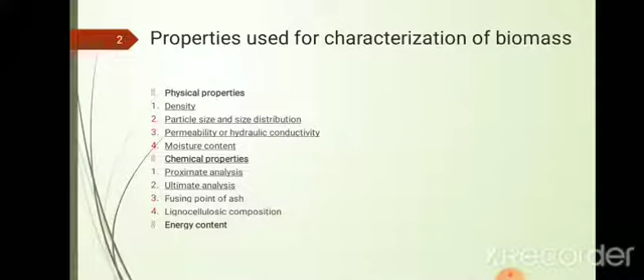Now remaining properties are, one is the fusing point of ash. Then another important characteristic is the ligno-cellulosic composition of biomass. And finally, energy content of biomass. So all these three we have to discuss in today's session. So first we will discuss the fusing point of ash. So what do you mean by fusing point of ash? As you know, the ash will be formed if you are using biomass in a gasifier, or if you are burning biomass in an incinerator or cook stove, etc. The residue formed will be ash.

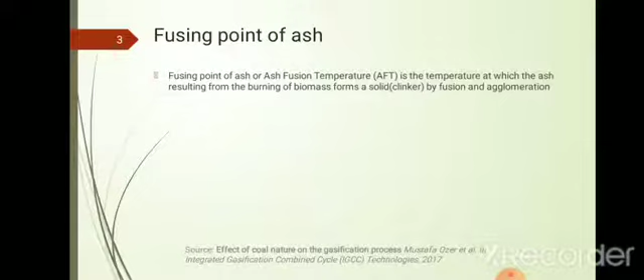So this fusing point of ash is also known as ash fusion temperature, AFT. It is the most commonly used name for this property. It is a temperature at which the ash resulting from burning the biomass forms a solid clinker by fusion and agglomeration. So it is the temperature at which this ash will start fusing, melting of ash will occur. So this will together join and will agglomerate. That is the temperature, the starting point of this agglomeration.

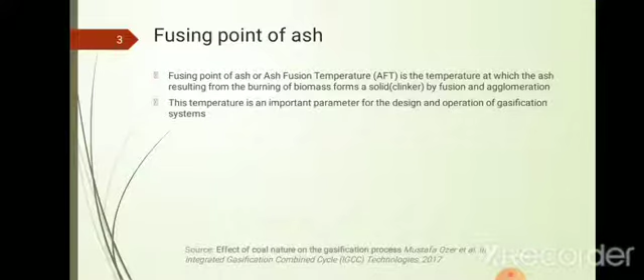And this temperature is very important in the design and operation of especially gasification systems. In fixed bed and in fluidized bed gasifiers, the operating temperature of the gasifier must be lower than this AFT. So that is the first thing we have to understand. In fixed bed gasifiers and in fluidized bed gasifiers, the operating temperature should be less than this AFT, so that this fusion will not occur.

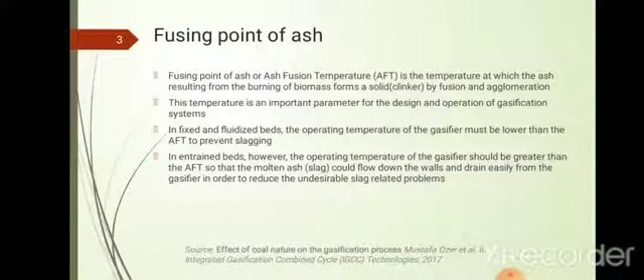But in entrained bed gasifier, that is a modern type gasifier in which high temperature is used and particle size is very less, the operating temperature should be greater than AFT. So why is it greater than AFT? So that the ash will melt and will flow down the walls of the gasifier and drain easily from the gasifier. That is for entrained flow gasifier, which will reduce the slag related problems. And typical ash fusion temperatures are around 1100 to 1200 degrees Celsius.

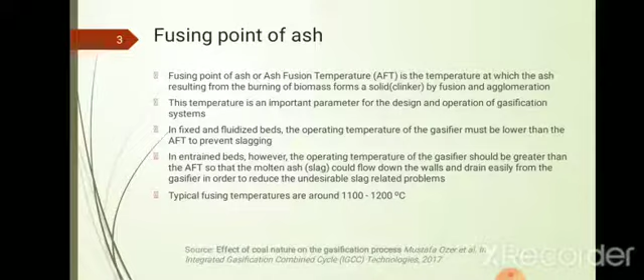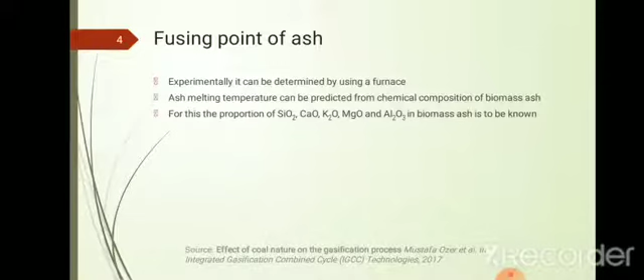And how can we determine this AFT? We have two methods. Either we can experimentally determine using a furnace by measuring temperature, etc., or we can predict the ash fusion temperature by knowing the chemical composition of this biomass ash. Different biomass ash will have different chemical composition. Mainly the ash contains silicon dioxide, calcium oxide, potassium oxide, alumina, magnesium oxide, etc. If you know the percentage of these compounds in that ash, we can predict the ash fusion temperature using empirical relations. Otherwise we can determine it experimentally, and this test is known as the AFT test.

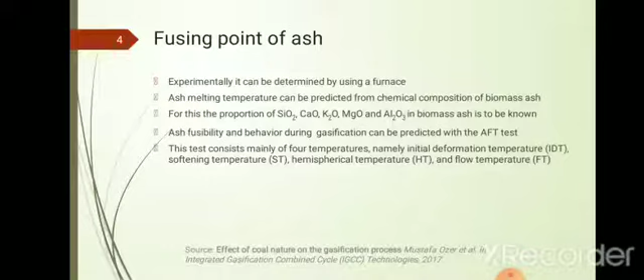And mainly in gasification, etc., if you have to study the effect of ash fusion temperature, we have to determine four temperatures, that is initial deformation temperature, softening temperature, hemispherical temperature, and flow temperature. All these are related to our ash fusion temperature. You can further refer to these with the help of journals and textbooks. So this is the importance of ash fusion temperature.

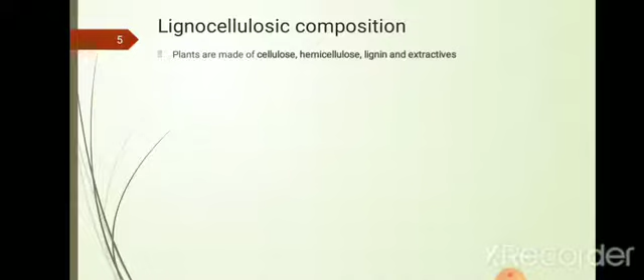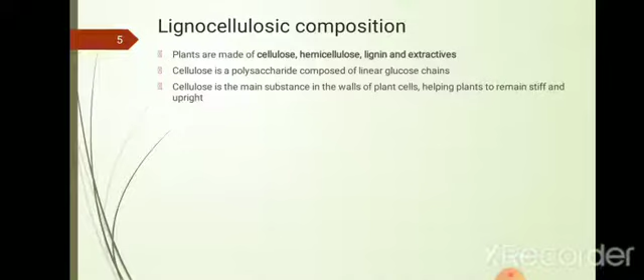Now another important property is the ligno-cellulosic composition of biomass. You may know that every plant material and parts like stem, leaf, fruit, etc. are made of these four compounds, that is cellulose, hemicellulose, lignin and extractives. Cellulose is a polysaccharide of linear glucose chains. It is a polymer of glucose, straight glucose chains, and it is a main substance in the wall of plant cells, and this cellulose helps the plant to remain stiff and upright.

While hemicellulose is different from cellulose, it consists of a short and highly branched chain of sugars. Its molecular weight can be 50 to 200 times the basic unit. So it is slightly different from cellulose. It is not a straight chain; a highly cross-linked structure is there. And it is a polymer of 5 different sugars, which are D-xylose, L-arabinose, D-galactose, D-glucose and D-mannose, and uronic acid. All these are organic compounds. So cellulose is just a polymer of glucose only, while hemicellulose consists of these 5 sugars and uronic acid.

And the branched nature of hemicellulose renders it amorphous, and it is relatively easy to hydrolyze. So if you are using fermentation for producing enzymes from biomass, or if you are using anaerobic digestion, like biogas, we will be anaerobically digesting this biomass to form methane and carbon dioxide. In that case, this hemicellulose is very easy to hydrolyze compared to cellulose and lignin.

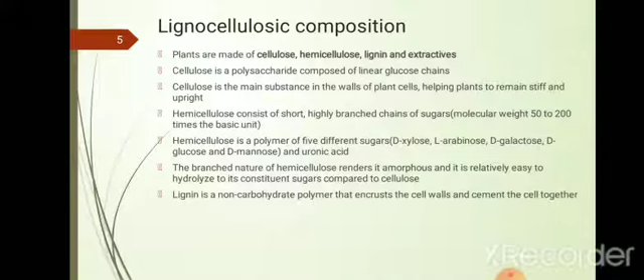And what is lignin? Lignin is a non-carbohydrate polymer that encrusts the cell wall and cements the cells together. So lignin helps to cement the cells of the plant, and it is very highly complex in nature. And lignin is hydrophobic in nature. That means it does not conduct water. So that is why the surface of leaves etc. contains lignin.

And the most important thing in our perspective is that lignin is the most slowly decomposing component of dead vegetation. So if you are using biomass for anaerobic digestion, that is for biogas production, this has to be considered. If our plant material is made mostly of lignin, it is not suitable for energy production through anaerobic digestion. So this is very, very important. We will discuss this in future.

Then what are extractives? Extractives are any substance that can be extracted from the plant using a solvent. They include crude protein and oils. Certain plants, seeds, etc. will contain oil, starch, sugar and other things. Anything that can be extracted using a solvent is known as extractives. So these are the 4 categories of plants based on their cell construction.

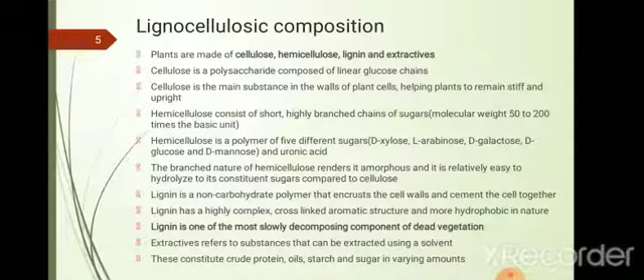Then there is a procedure for determining all these. There are chemical engineering procedures for how to determine all these four quantities. So first we have to determine the extractives. For this we take a dried sample, a known mass of biomass, say M0 gram, that is leached with a benzene and ethanol mixture in the volume ratio of 2:1 at a fixed temperature for 3 hours.

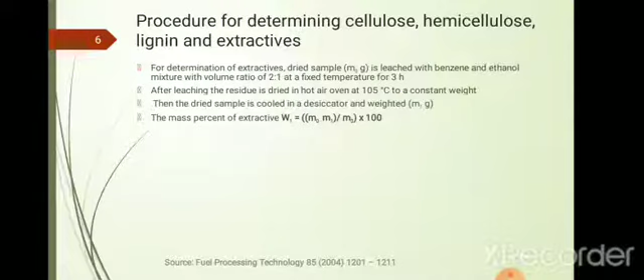And after leaching, this is again dried in a hot air oven at 105 degrees Celsius to constant weight. This will reduce the mass; the extractives will be removed and the weight will reduce. The dried sample is cooled in a desiccator and weighed, giving M1 gram. Initially it was M0 gram, and after this procedure it is reduced to M1 gram. So the percentage of extractives, W1, will be M0 minus M1 divided by M0 into 100%.

Then after that we will determine hemicellulose for the same sample, this M1 gram. After the first procedure, the residue is put in a flask with 150 ml sodium hydroxide solution, that is 20 gram per liter of sodium hydroxide. Then it is boiled for 3.5 hours with recycled distilled water. Then the residue is washed with distilled water till no sodium ion is present in the washed liquor, and dried. Again it is cooled in a desiccator and weighed, and the weight will be reduced to M2 gram.

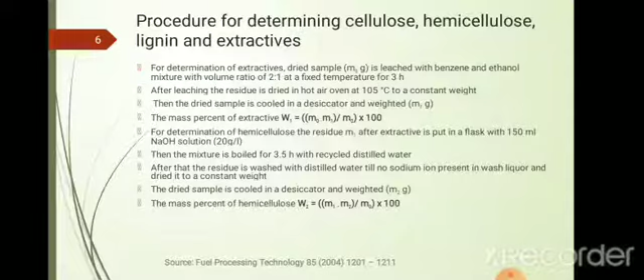So initially we have taken M0 gram. After extractive determination, it was reduced to M1 gram, so extractive is M0 minus M1 by M0. Then the M1 gram has gone through the second procedure with sodium hydroxide, and it is reduced to M2 gram after drying and cooling in the desiccator. Then hemicellulose will be W2, which is M1 minus M2 divided by M0 into 100%. Again the denominator is the initial mass M0. The hemicellulose removed is M1 minus M2, so that is our ratio of hemicellulose.

So now cellulose and lignin are remaining. Third, we have to determine lignin. For this we take about 1 gram of residue after the extractive analysis. This weight is again dried and cooled, and it will be M3 gram, and it is mixed with 30 ml of sulfuric acid. So now we are using acid for removing lignin. The sulfuric acid is 72% concentration and is kept at a temperature of 8 to 15 degrees Celsius for 24 hours.

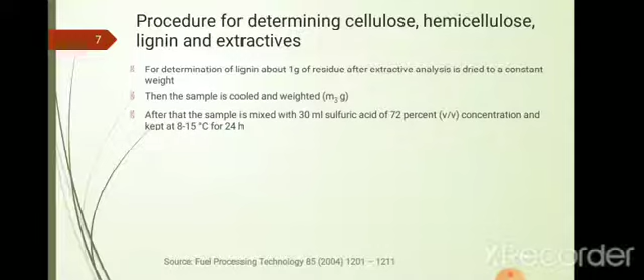This mixture is diluted with 300 ml of distilled water and again boiled for 1 hour with recycled distilled water. Again, after cooling and filtration, we have to wash it so that no sulfate ion is present. Sulfate ion can be identified using a 10% barium chloride solution. Then it is dried, and the new weight after cooling and drying in a desiccator is M4 gram.

So the mass percentage of lignin, W3, will be M4 into 1 minus W1. We have taken 1 gram of mixture initially, then minus W1. W1 is extractives; we have already removed the extractives. Extractives converted into a fraction, small w1, is capital W1 by 100. Divided by M3, because we have M3 gram after drying and cooling before this experiment. So M4 into 1 minus W1 divided by M3 into 100%. This is our lignin percentage.

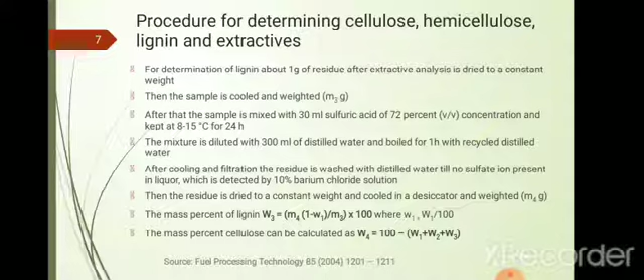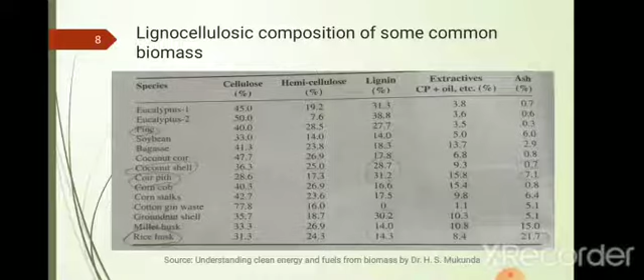And the last one is energy content. What is energy content? We are mainly looking for the calorific value or heating value of the biomass. Heating value or calorific value of a substance is the amount of heat released during combustion of a specified amount of it. Normally, for liquid and solid fuels, it will be in kilojoule per kilogram, kilojoule per mole, kilocalorie per kilogram or BTU per pound. All these units we can use for the energy content.

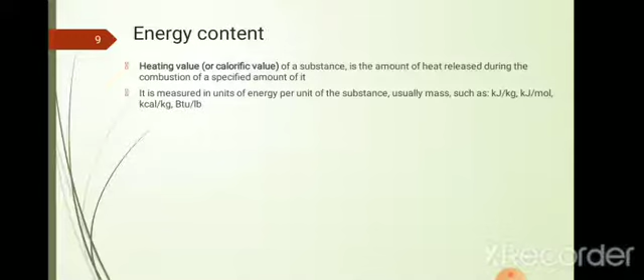But for gas, the calorific value will normally be in megajoule or kilojoule per normal meter cube. So instead of kilogram it will be mostly in meter cube, and we can convert that into kilogram using the volume flow, etc. So this is our heating value, and we have two heating values. We already know higher heating value, HHV, also known as the gross calorific value.

So what is higher heating value? If the products of combustion are brought back to the original pre-combustion temperature and all the vapors, mainly water vapor, are in condensed state, this will be the higher heating value, because the water vapor will give its latent heat of vaporization and contribute to the calorific value. Normally this temperature is standard temperature and pressure, that is 15 degrees Celsius, not room temperature, not 30 degrees. It is assumed our products are at 15 degrees.

And what is lower heating value? Lower heating value is determined by subtracting the latent heat of vaporization of water vapor from the higher heating value. So in lower heating value our products, especially water, will be completely in vapor state, not condensed state. We will determine the higher heating value experimentally, and we can calculate the lower heating value by subtracting this latent heat of water.

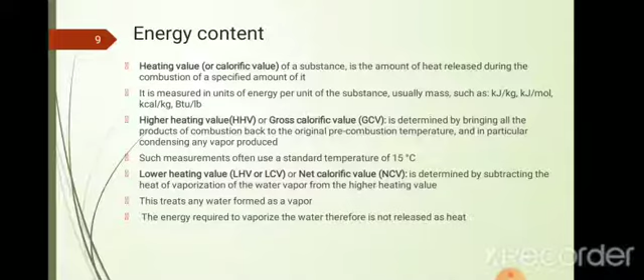So here the energy required to vaporize water is not released as heat. That is why it is less than the higher heating value. Now we have to determine this for solids, and our biomass will be mostly in solid or liquid condition. Gaseous biomass is not that present. It will be converted to gas only after gasification or some other process.

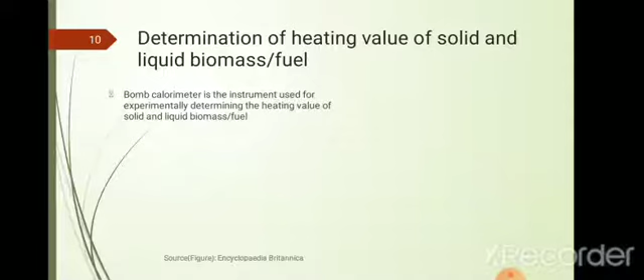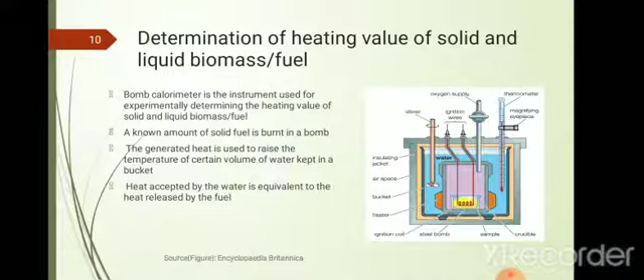The heat liberated by burning this sample is used for raising the temperature of a certain quantity of water kept in a bucket, and heat absorbed by this is equal to heat released by the fuel or biomass. So this is an actual bomb calorimeter. You can see a crucible where we place the 1 gram measured sample, and it is inserted in a bomb, and we have an oxygen supply inside that bomb. Then that is placed inside the water bucket, which is again placed in a steel container. Mostly all of the material will be stainless steel, and we have provision for measuring temperature, etc.

So what is the procedure? First, a 1 or maybe 1.5 known grams of biomass is placed in the bomb, and it is pressurized with excess pure oxygen, and it is submerged in a known volume of water, mostly 2 kilograms of water, and this water bucket is put inside a steel container, and then it is electrically ignited. It is burned, the energy is released, and it crosses the stainless steel wall.

So first it has to cross the stainless steel wall of this bomb, and it will increase the temperature of the water jacket. It will not purely increase the temperature of the water jacket; some heat is absorbed by the bomb container also. It is made of stainless steel with some heat capacity, so its temperature will also increase, and we will measure this with a thermometer, and when it reaches an equilibrium temperature we can calculate the calorific value.

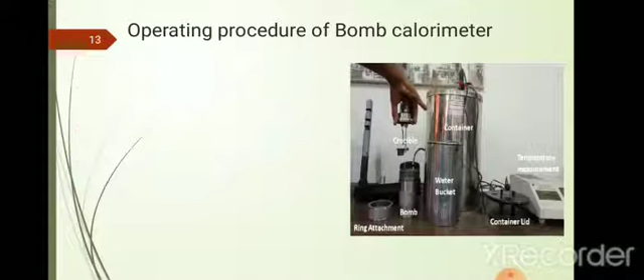And once the experiment is over, we can release the pressure by reducing the oxygen supply, and after the experiment we have to check the bomb for any soot formation. If there is some incomplete combustion, there will be some carbon soot or particles present inside the bomb. If that is the case, the test is to be repeated. So after the test we have to check the bomb for any soot formation, because it implies that there is an incomplete combustion.

And after the experiment, the interior surface of the bomb is washed with a jet of distilled water. So we will wash it with distilled water, and these washings are titrated with the standard sodium carbonate solution, using methyl orange or methyl red indicator. Normally 0.0709, so that much concentration of sodium carbonate solution is used for titration.

And another thing, we have to find out the unburned piece of fuse wire. The unburned piece of fuse wire will be there inside the bomb, and we have to straighten that, and the combined length is subtracted from the initial length. Normally 10 centimeters will be the initial length of fuse wire. This is for finding out how much energy is contributed by the fuse wire.

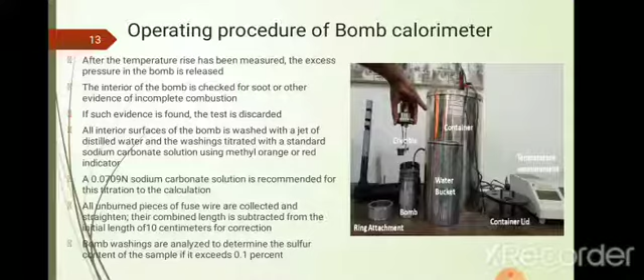Similarly, the washings have to be analyzed for any sulfur content. If the sulfur content present in these washings is more than 0.1 percent, we have to again do some error correction for that. So there are three error corrections we have to do: one is for the fuse wire contribution, another one is for the presence of sulfur, and another one is for the sodium carbonate titration. So we will see how it is calculated based on this experiment.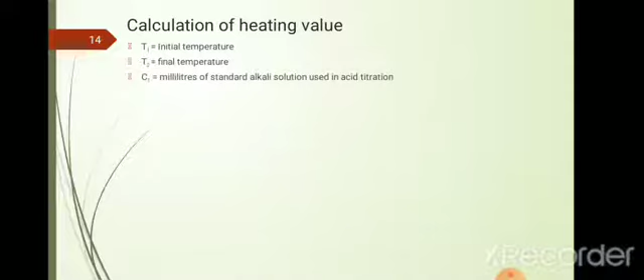Suppose T1 is our initial temperature, that is before the ignition. T2 is the final temperature, and C1 is milliliters of standard alkali solution, that is sodium carbonate solution, used for acid titration. C2 is the percentage of sulfur in the sample, and C3 is the centimeters of fuse wire consumed. M is the mass of sample, normally it will be 1 gram.

And capital W is the energy equivalent of the calorimeter in calories per degree Celsius. These are calculated in calories, and then we can convert into kilojoules or megajoules, etc. So what is this W? Actually it will be the heat capacity of water plus heat capacity of the bomb material. So it will be mass of water; suppose we have taken 2 kilograms of water, it will be 2 into specific heat of water in calories per degree Celsius,

plus mass of the bomb material into its specific heat, that is the stainless steel bomb wall material. So this is a constant for a particular bomb. If you purchase a particular bomb calorimeter, this capital W, the energy equivalent, will be given by the manufacturer or supplier. Actually this is the mass of water into specific heat of water plus mass of the bomb into specific heat of that material. So it will be supplied.

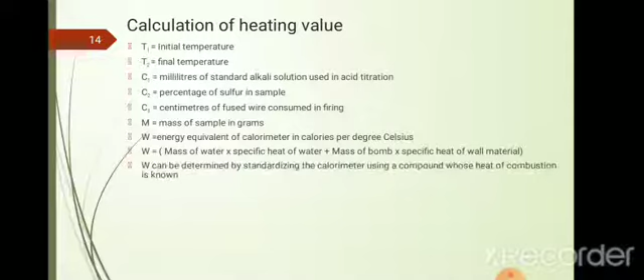Or we can calculate this by using a known material whose calorific value is known, and normally a pellet of benzoic acid, not less than 0.9 gram or more than 1.25 gram, is used. This is not required if it is supplied by the manufacturer; otherwise we have to determine this capital W. For this we use a known quantity of a particular fuel, here a pellet of benzoic acid, whose calorific value we know. Using that we carry out the test, find the temperatures, and back calculate the W value for future purposes.

And by energy balance, this is a basic equation. We know that energy given by the biomass sample is equal to the energy gained by the bomb plus water. So M into CV, capital M is the mass of sample, into calorific value will be this water energy equivalent W into temperature change, that is T2 minus T1, delta T.

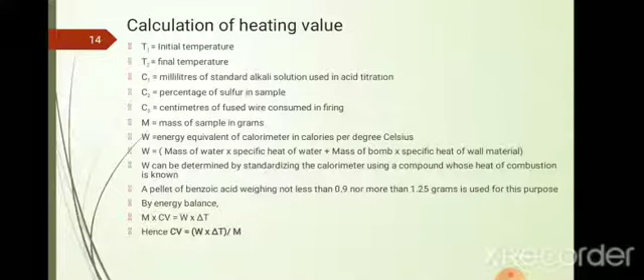So CV, what will be the calorific value? It will be W into delta T divided by M. So this is the equation we can use, but we already said that some error corrections are required. So three error corrections. First, what is E1? E1 is the error correction in calories for heat of formation of nitric acid, that is acid formation. We have titrated with sodium carbonate and we can say the acid formation.

So the error corresponding to that will be C1 calories. Directly we can take C1 calories. We have already defined what C1 is. It is the milliliters of sodium carbonate solution used for titration. So our E1 will be equal to C1, the milliliters of sodium carbonate used for titration. We can directly take it in calories.

And E2 is the correction in calories for sulfuric acid formation, that is due to the presence of sulfur, and it will be 13.7 into C2 into M calories. So this equation we can directly use. Remember E1 is the error correction for acid formation, mainly nitric acid formation. After titration with sodium carbonate, if you are using C1 milliliters of sodium carbonate, this error correction will be equal to C1 calories.